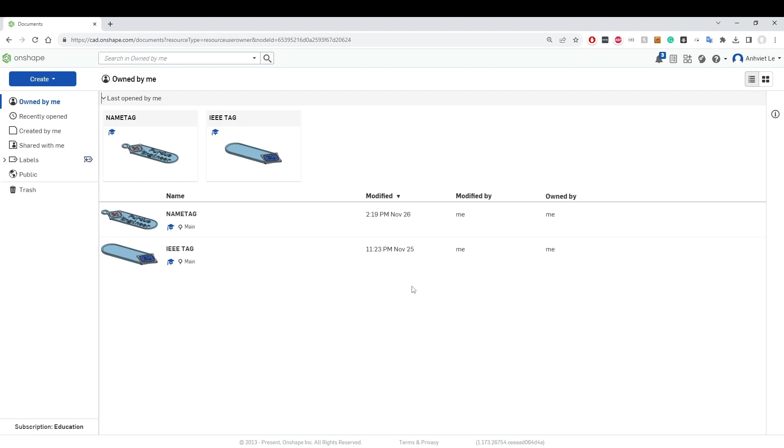Once the item is created, click on the top right where the name is, click Account, then Preference. Make sure the default units are on millimeters. Then scroll down and you can change the mouse settings to however you like. There are options for SolidWorks, NX10, Creo, and AutoCAD.

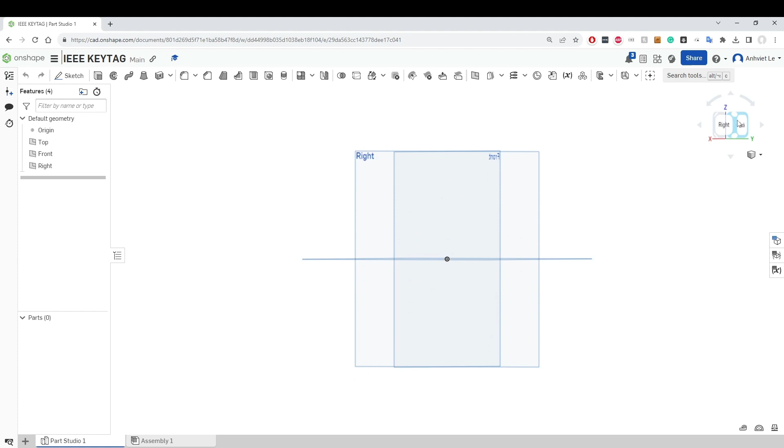If you right click and drag around, you can rotate. If you hold Control and do the same, you can pan around. Click on the corner of the cubes to get different views. You can click on the side of the cube to get an overall view.

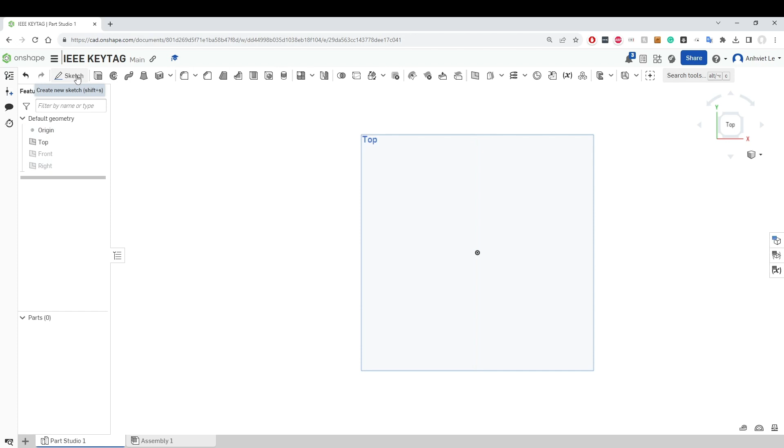Click these two icons to hide the front and right view. We're going to be focusing on the top view from now. Click on the sketch in the top left, then click on the top view. This lets us put a two-dimensional sketch on the top plane. We can rename it. I'm going to call it Import DXF.

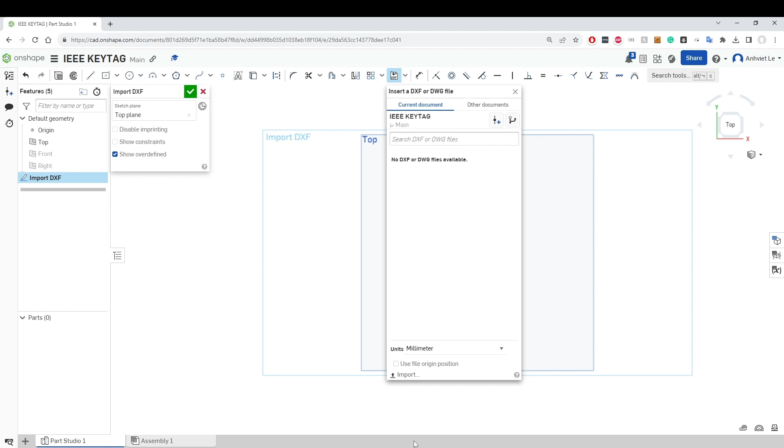Then select the DXF button and click Import DXF. Click Import and choose the file that you downloaded, then click Open. Then select the item, and it should display on the screen.

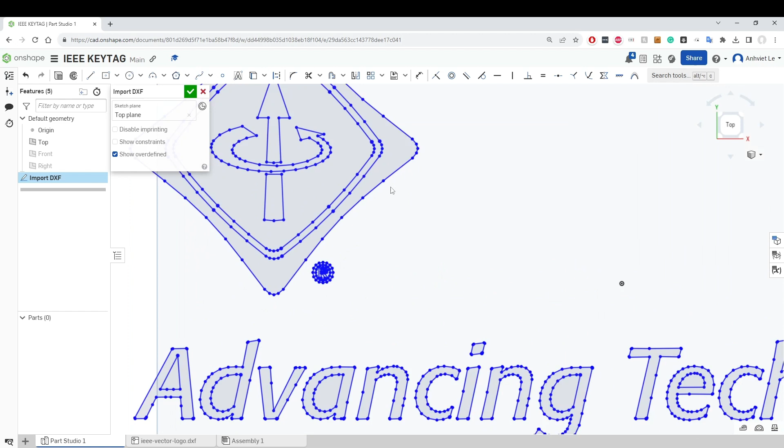Use the mouse wheel to scroll in. We're going to click the inner and outer edges of the logo, and on the top left, click Extrude.

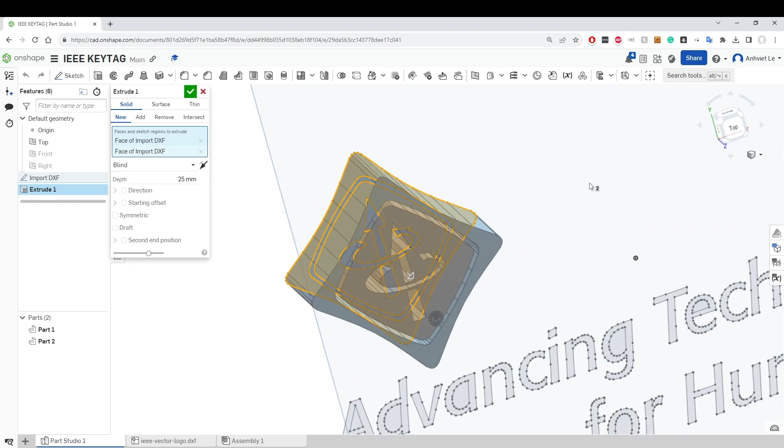If you look at different angles, you can see that normally Onshape extrudes at 25 millimeters. We're going to click the corner of the cube to look at a different perspective, and change this 25 millimeter number to 3 mil. I think this is a good Z height for our key tags. Click Enter.

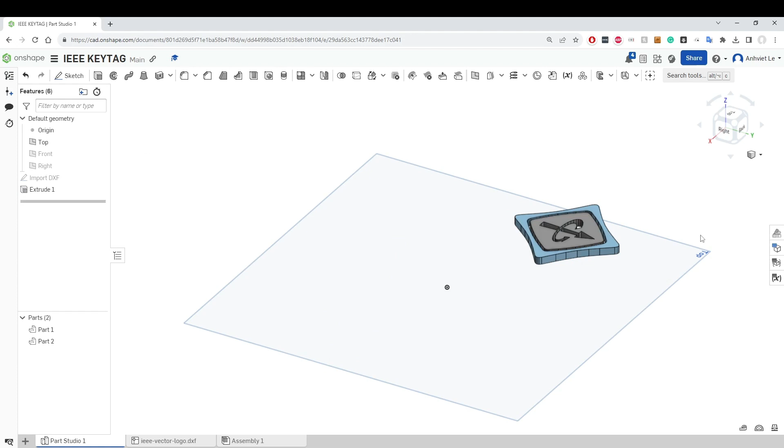If you look at different views, you can see the IEEE logo, but it's missing its back. So let's fix that.

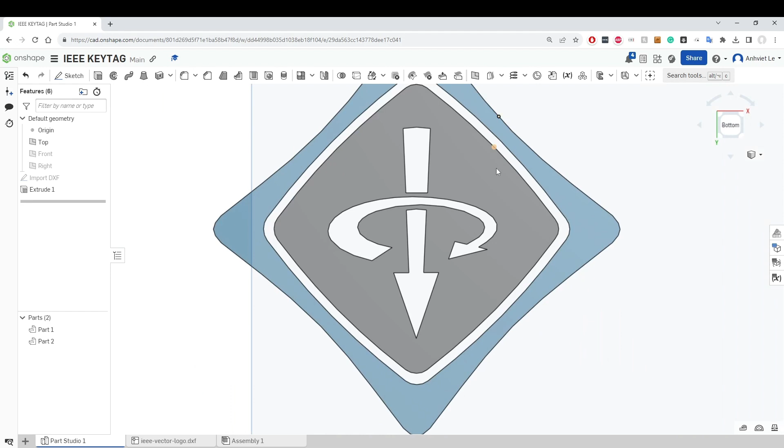Let's click on the bottom view, move around, and create another sketch. Click on the sketch icon and click on the back of the IEEE logo. We're going to create a two-dimensional sketch here. Let's rename it. Let's call it Back Logo Sketch.

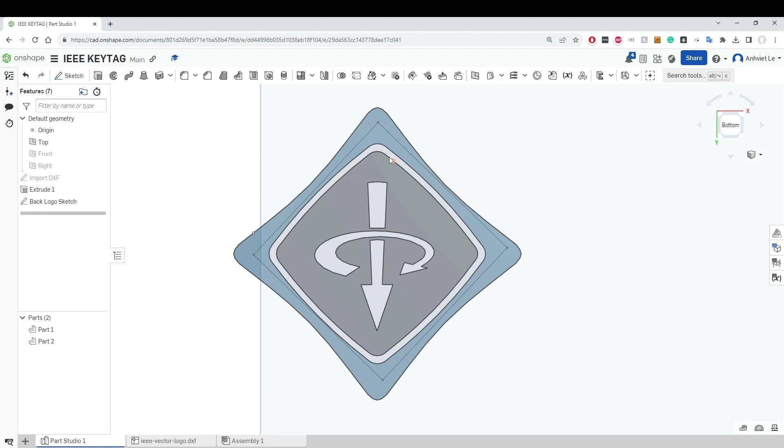Let's do an aligned rectangle from the rectangle box. We're going to try to get the inside, try to cover the inside perimeter of the IEEE logo. So that should do it. Click it, and now you have this aligned rectangle box. We'll click the check mark. We should see that we're able to hover inside and select the inside of the logo.

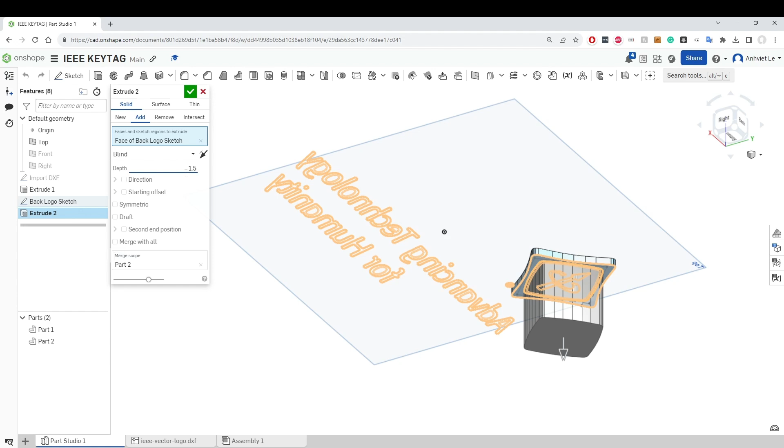We're going to click the extrude button, and if you look at different perspectives, at this corner angle, we can see it's coming out 25 mil. We want about half of 3 mil to give that a backing, but you see it's going the wrong direction. Click on the arrow and it'll go towards the other direction.

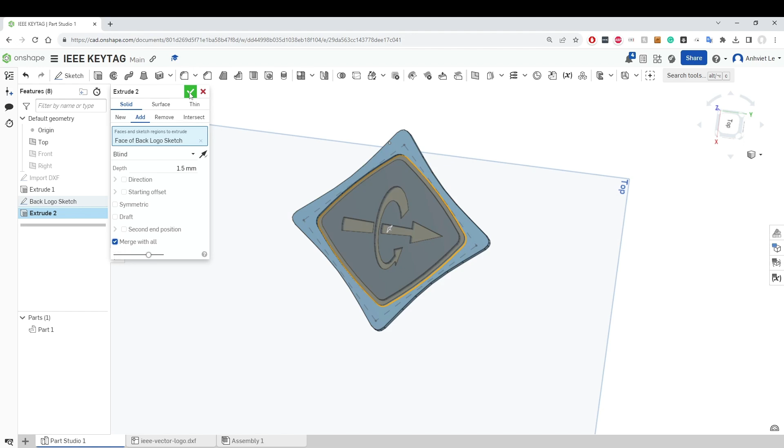All you have to do is click merge with all, and now we combine the parts together. Click OK. We have one object, the IEEE logo, as one item with a solid backing.

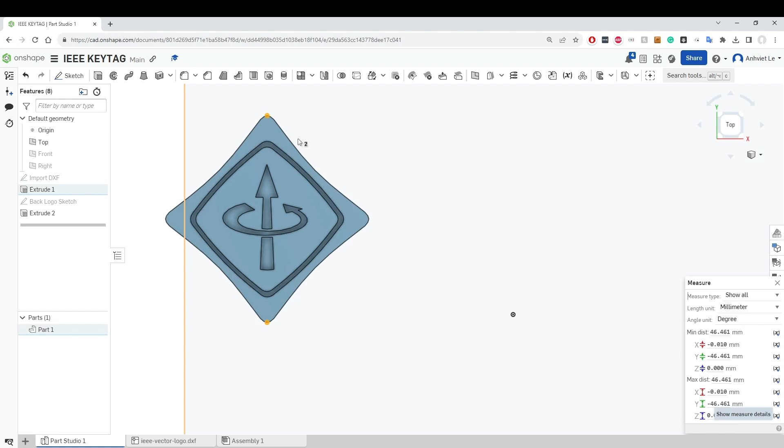Now let's measure this logo. Click the top view, zoom in, and on the bottom right, click this measuring icon. I'm going to click two points, on the bottom and on top of the logo. And we get roughly 46 millimeters distance.

So we're trying to get that down to 30. Let's do 30 divided by 46, which is 0.64. So we try and shrink this about 0.64, or 64%.

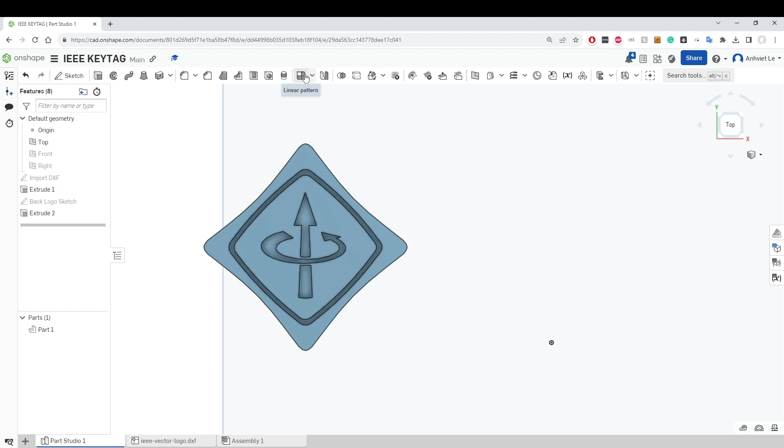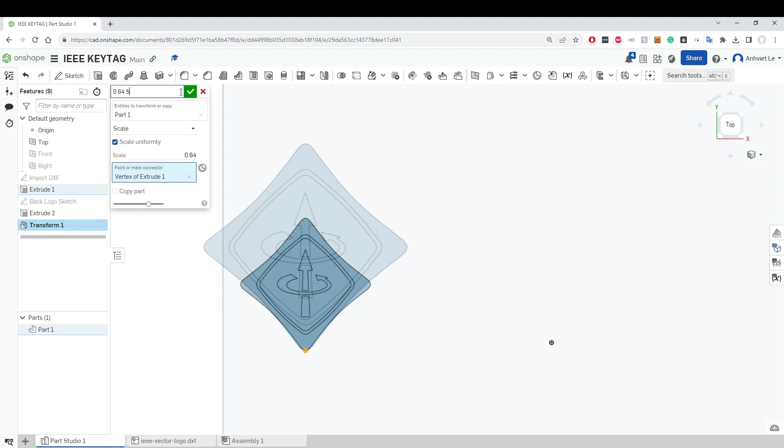Click on the part, click transform, we can click scale, and then type this value, 0.64. And we're going to shrink it, click rename it, call it 0.64 scale, click OK.

And now if you measure it again, we're roughly under 30 millimeters, 29.7. Okay, now let's start building out the rest of our key tag.

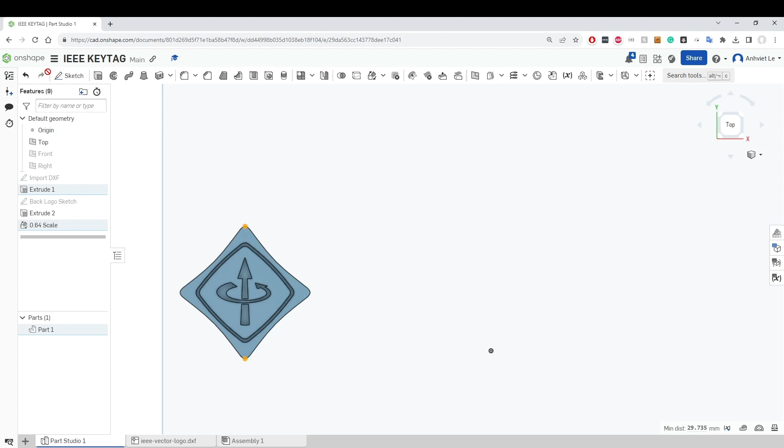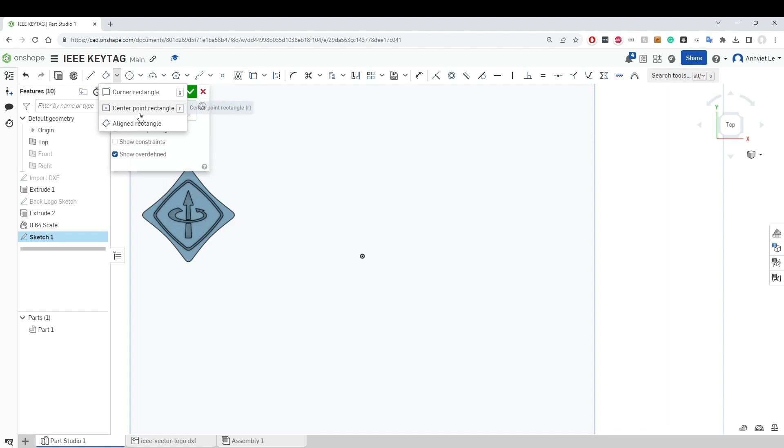So let's build the rest of this key tag out. Click on sketch, and click on the top plane, and let's do a center point rectangle at the origin, and drag it out. Doesn't really matter.

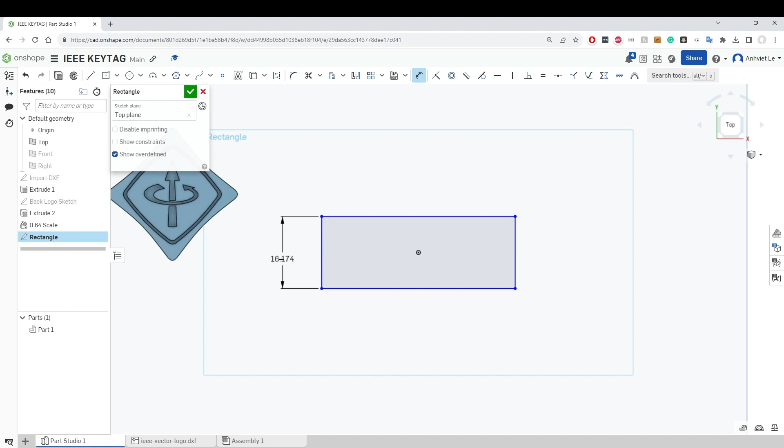I'm going to click on the dimension icon in the top bar. I'm going to click on the left of the rectangle, drag it out, and 30 millimeters should be good enough height. And then I'm going to do the same on the bottom, and 60 millimeters.

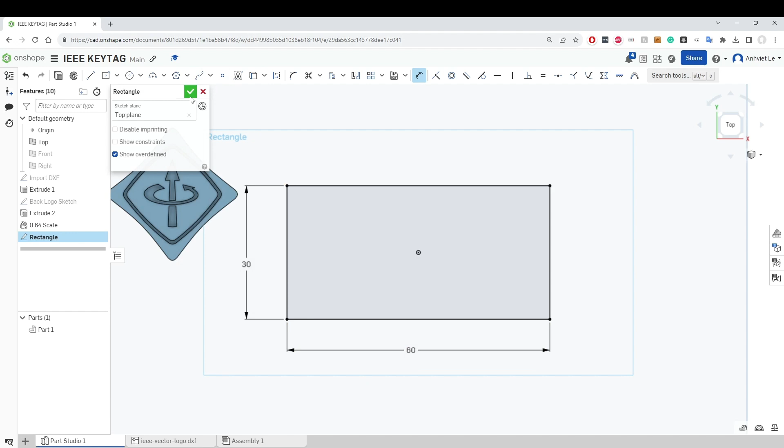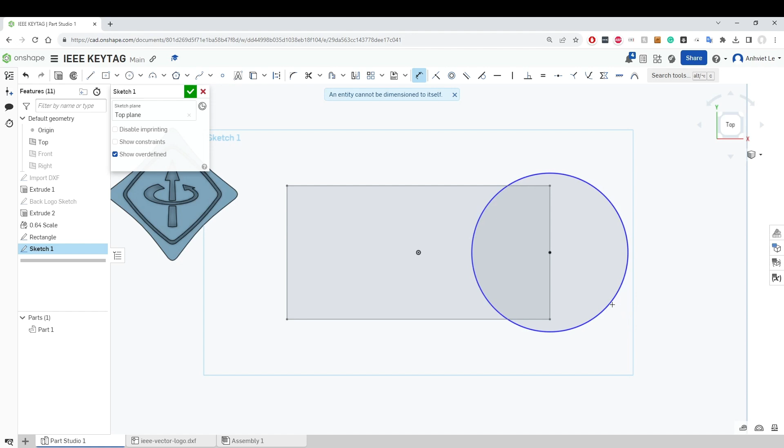Go and create another sketch. Let's do it on the top plane. Let's do center point circle, kind of line it up here. Doesn't matter the measurement now. We're going to click on the distance tool, click inside the circle, and click again. Let's do 30 millimeters.

Let's name the sketch. So I'm gonna call it circle.

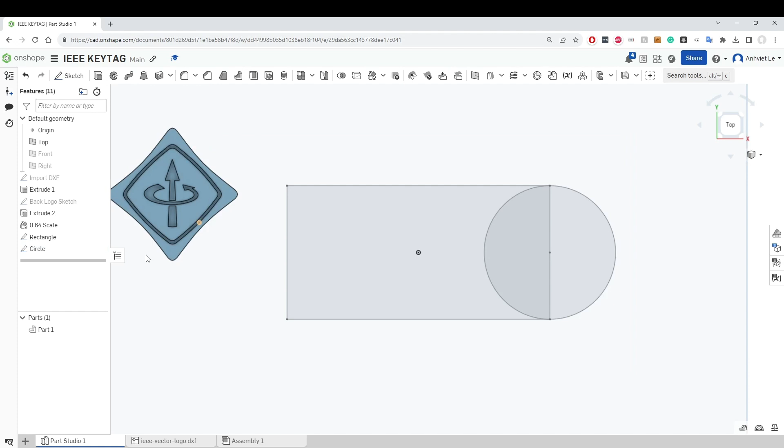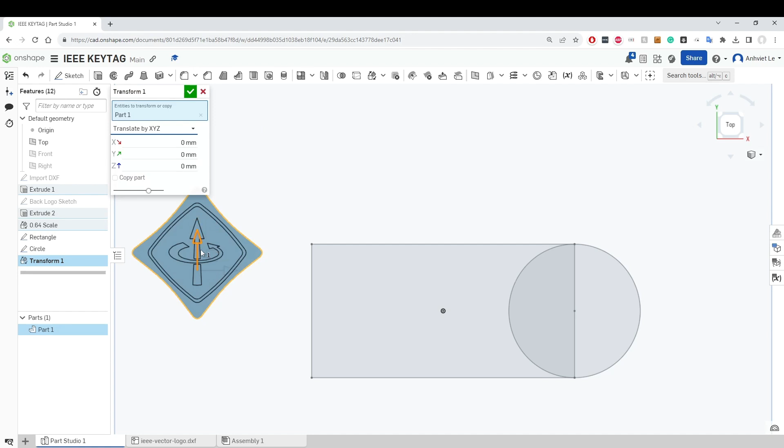Let's move this logo, the IEEE logo. So we're gonna click on parts on the bottom left, click on transform, and then we're gonna click on translate by XYZ, the third one down. Let's move it around and bring it closer towards the rectangle. It's the right arrow to move to the right, and up arrow to move up.

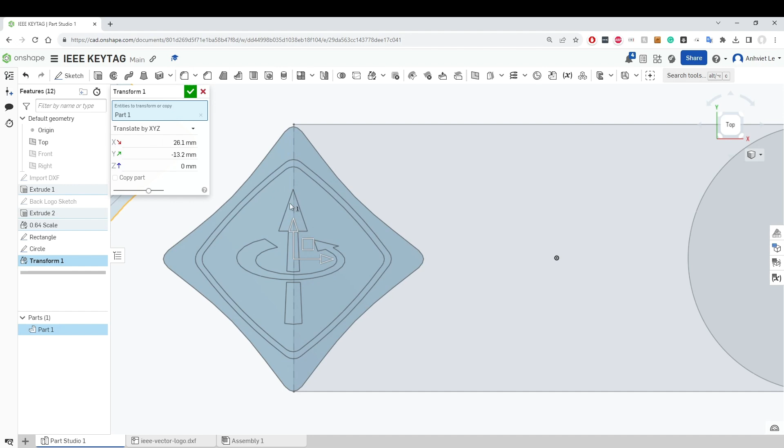Let's create another sketch. Click on the top plane, and let's click on the line icon on the top left. Click on the bottom of the IEEE icon, drag it over to somewhere around in the middle right here, and to the top of the IEEE icon, and then to the right of the rectangle, bottom right of the rectangle, and connect it all the way back to the bottom of the IEEE icon.

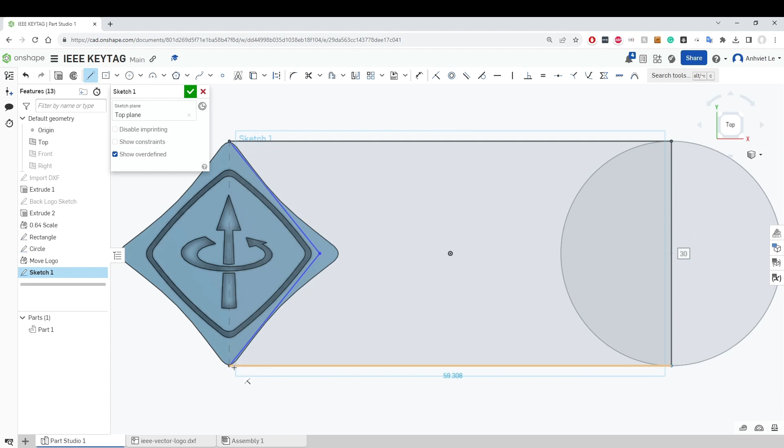So click the inside of the rectangle, the outer side of the circle. Click extrude. Just click on merge with all. And if you look, 25 mil is too big.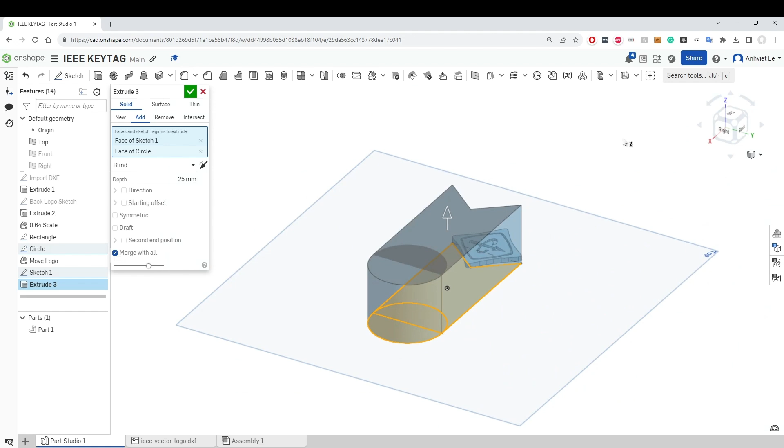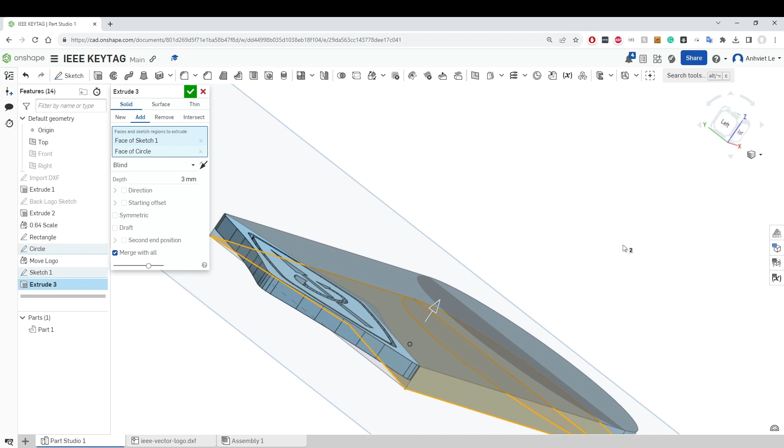Let's do 3 millimeters real quick, just to compare. That's the height we want. And something doesn't look right. Oh, the IEEE logo, it's smaller. So yes, we made a mistake early on.

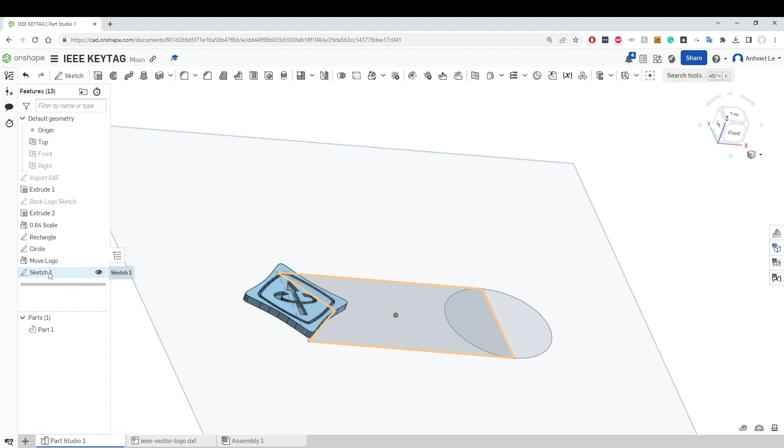The good part about OnShape is that we could go back and fix this. So let's do that. Let's close out that sketch. Let's go up to the scale right there. Let's click on edit, and where it says scale uniform, unclick that. The z-axis we should not scale. The height should remain at 3 millimeters.

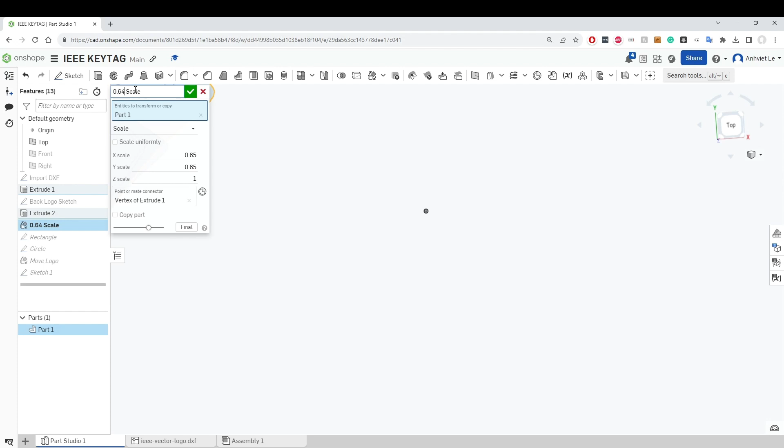Let's put x and y to 0.65. I want to make it a little bit larger. Let's rename it. Okay, click save, check mark. And yep, our logo is a little bit bigger than that 30 millimeters.

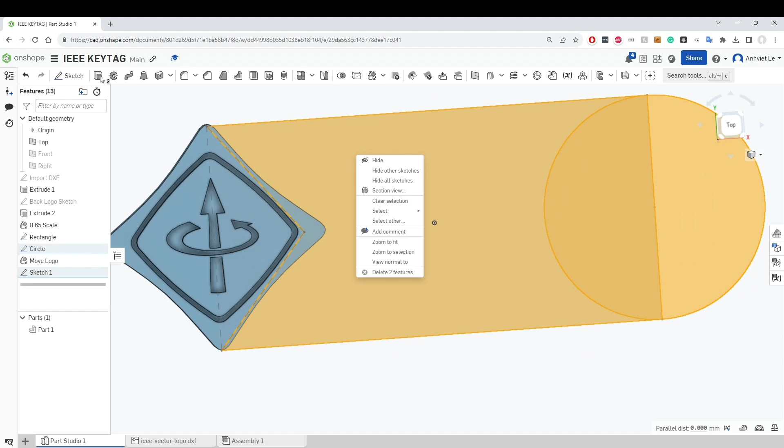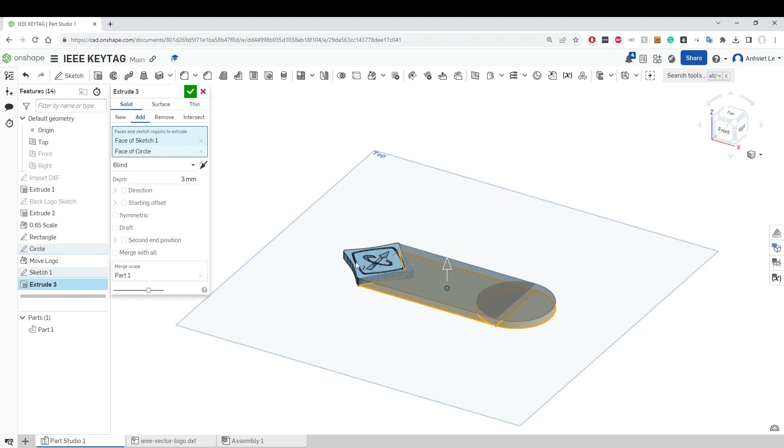I'm gonna click the inside outer edge, and let's extrude it now. Click on the side corner. You'll see it's way too tall. Let's look at it at 3 millimeters. And it looks pretty good. The height of our extrusion looks like it matches the logo.

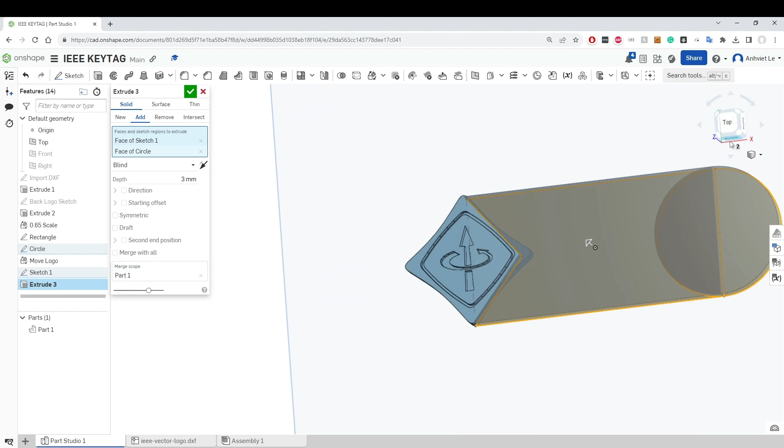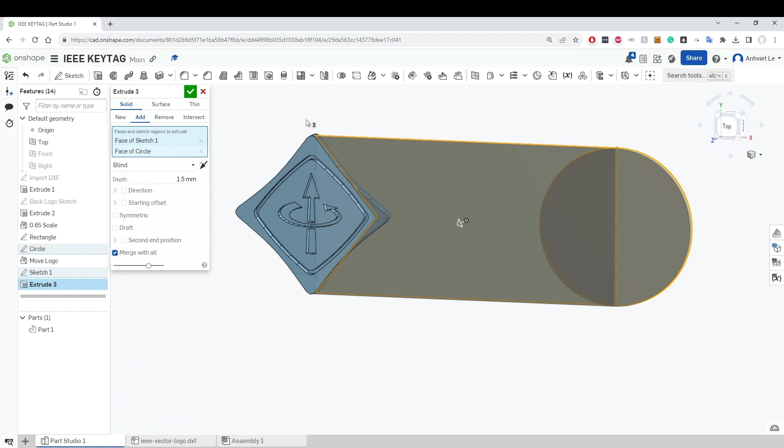We could test that by clicking on the left side view, and yep, it's flat. Perfect. Let's set the 3 mils to 1.5. Merge with all and confirm the change. Perfect.

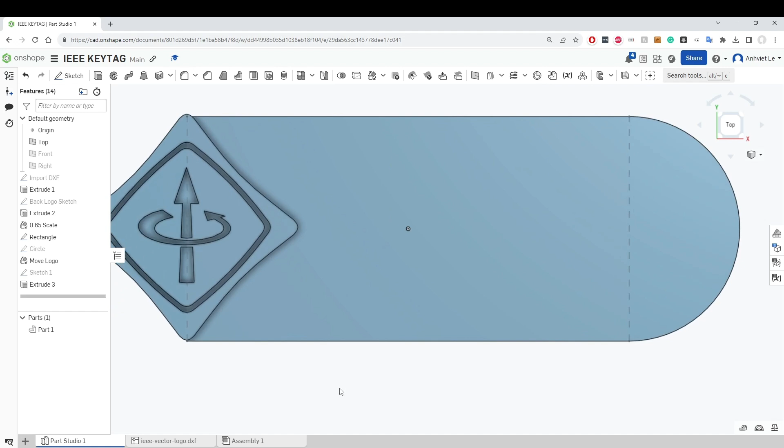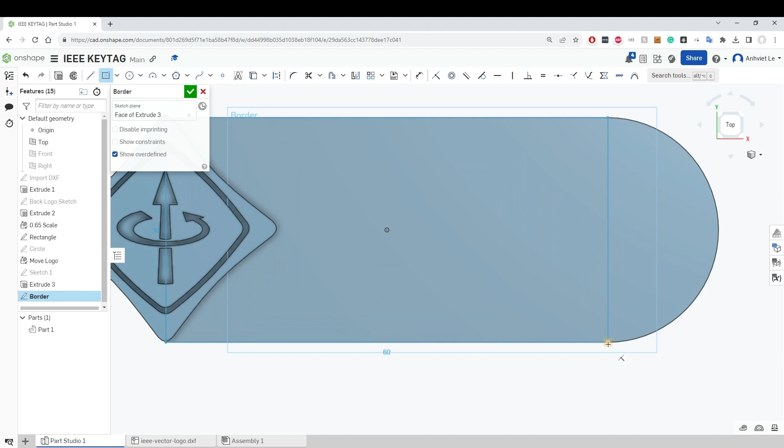So time to build out the border of all edges. I'm gonna zoom in a little bit. I'm gonna create another sketch. I'm gonna click on the inside the Keytag plane. I'm gonna call it border. I'm gonna make a center point rectangle. Sketch. Drag it across. 60 wide.

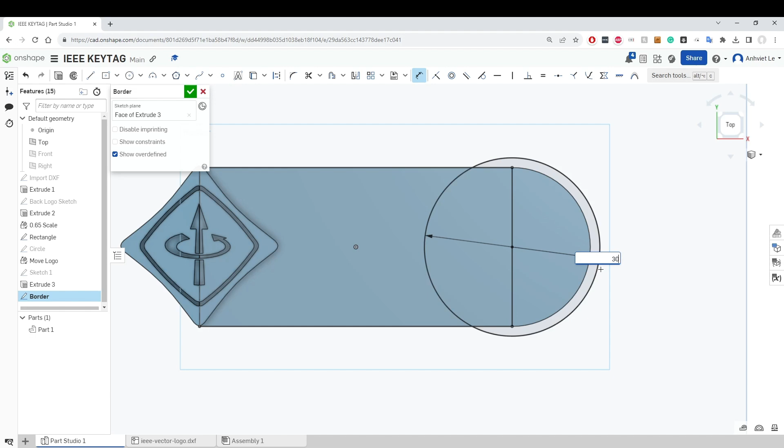Perfect, awesome. Let's do the same thing with a center point circle. So click it. Can't get it to that 30 mark, so I'm gonna use the dimension tool. Click on the circle. Type in 30. Boom, got my circle sketch. So we have the outer perimeter.

Let's do the inner perimeter. So same thing, center point rectangle. Try to get to 60 wide. Good. But now I gotta adjust the height for the inner rectangle. So find it. Okay, found it.

And then I'm gonna do 28. No, I think it's too thick of an outside border. Let's do 29. Too small. Let's do 28.5. Yep, I like it.

Let's do the same thing for the center point. Oops, wrong one. Center point circle, and let's do the dimension, and let's type in 28.5.

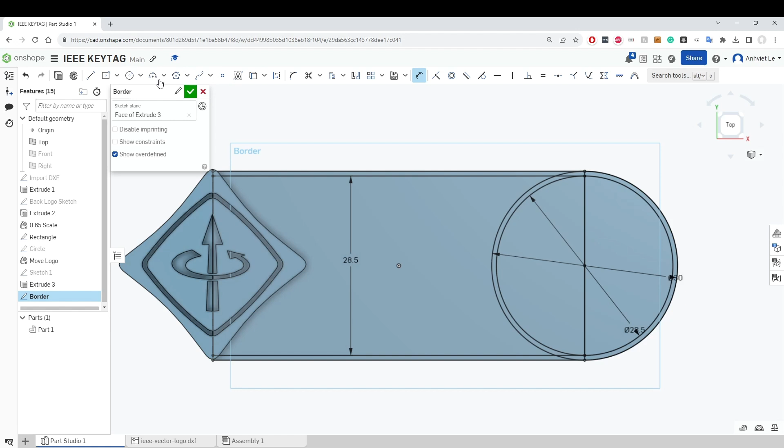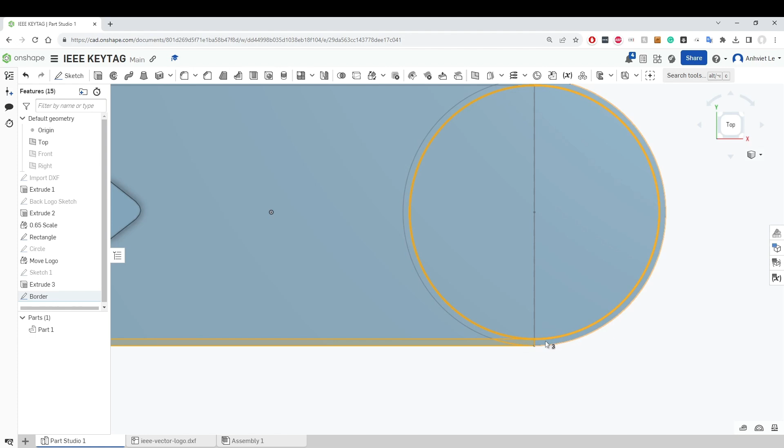Okay, I'm gonna click OK. I'm gonna zoom in and try to select the outer bounds of these circles. It's a little difficult. Select all of them, let's go up at the top and get to the last part. Come on.

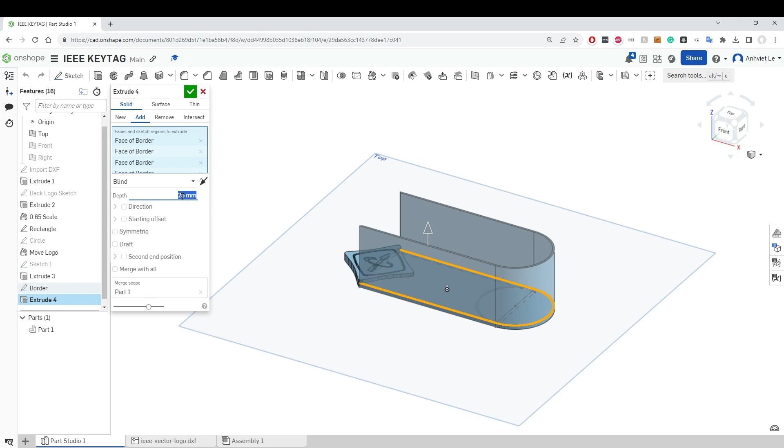Got it, okay. Now we're gonna extrude. Click the extrude button, and we already know we're 1.5 millimeters high, so 25 is too much. We're gonna add another 1.5 to get to that 3 millimeter mark.

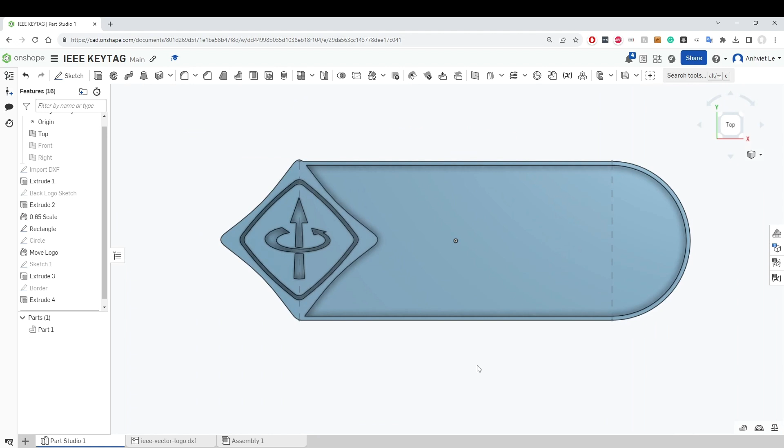Okay, great, looks good. Now it's time to create the ring, the key ring portion where the ring hooks onto. I'm gonna move around, see what's the best way to do this. Just bring it to the back and create a sketch. Click on the back of the key tag.

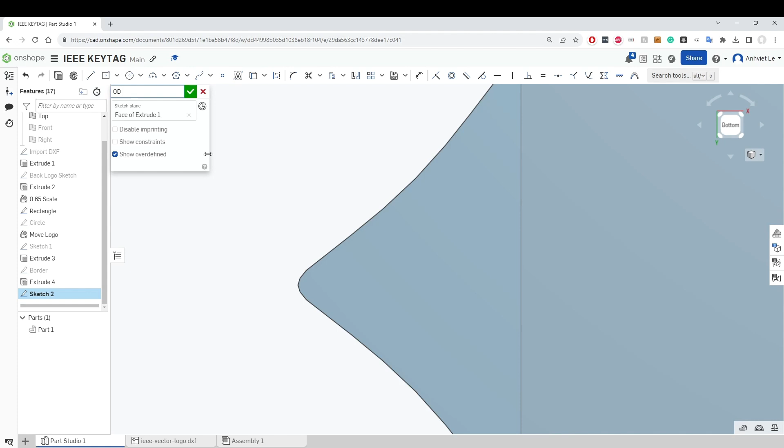Zoom in. Center point circle, and around right here, drag it out, and just call it 12 millimeters. Let's do another center point circle. Let's do this one for 8 mils.

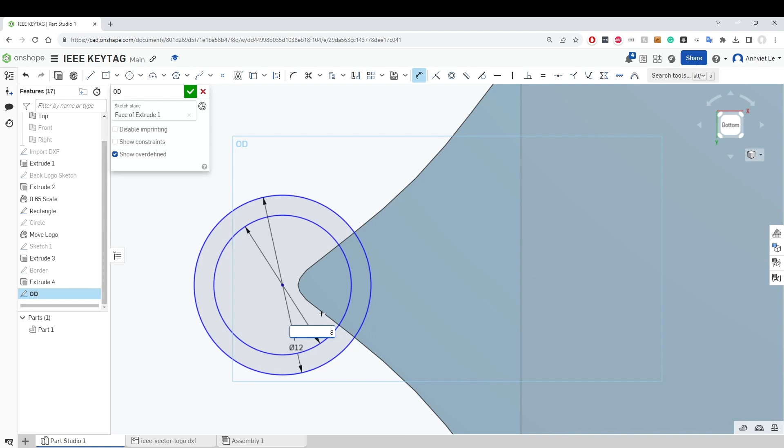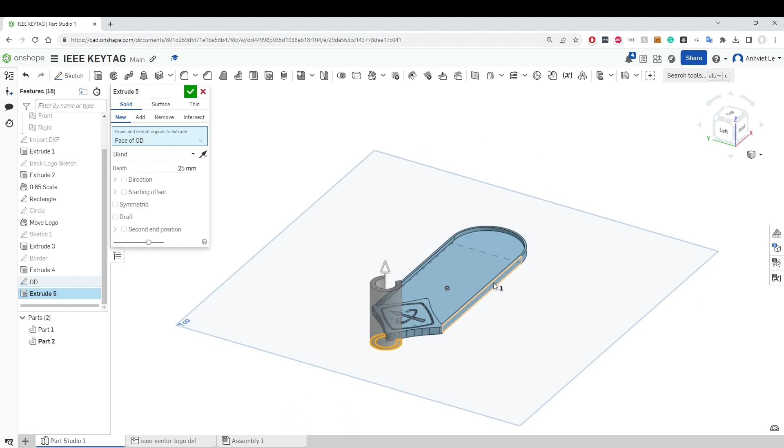Click OK. Click on the outer circle, and let's click extrude. It's the wrong direction, let's flip the direction. Three millimeters, now this should match. I'll confirm the changes. Once I click merge, it was done. Now we can start adding some text.

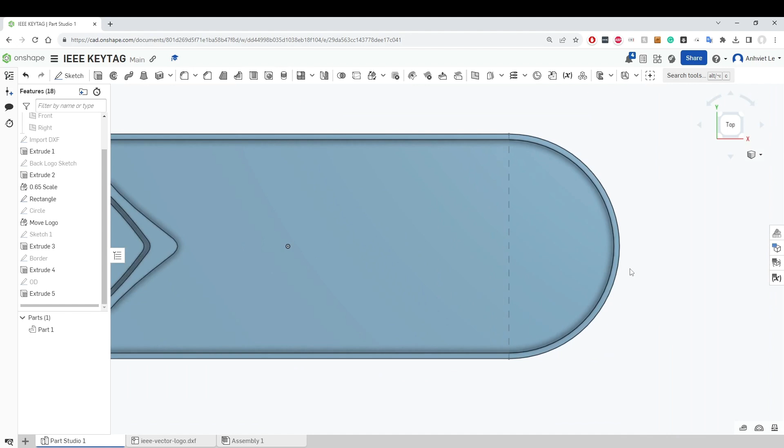To add text, I'm gonna add a sketch. Click inside the key tag. I'm gonna call it the top text. And then I'm gonna click text, drag a box. And then let's think of something. Let's go Purdue. Okay.

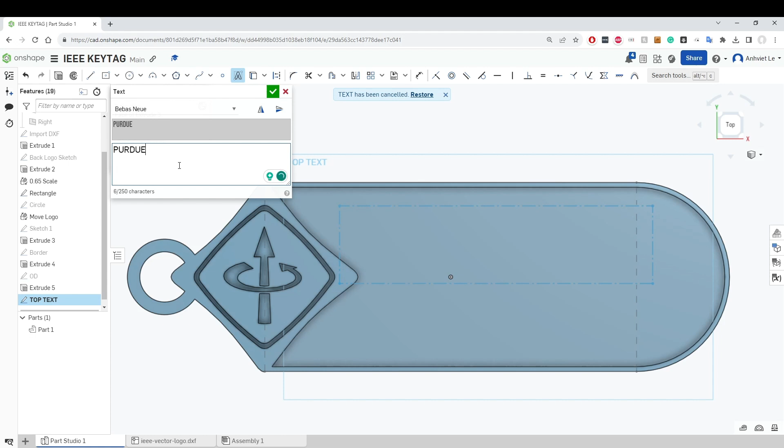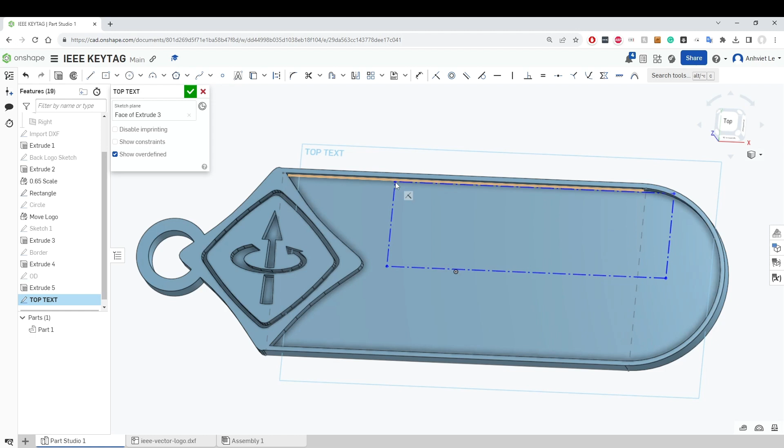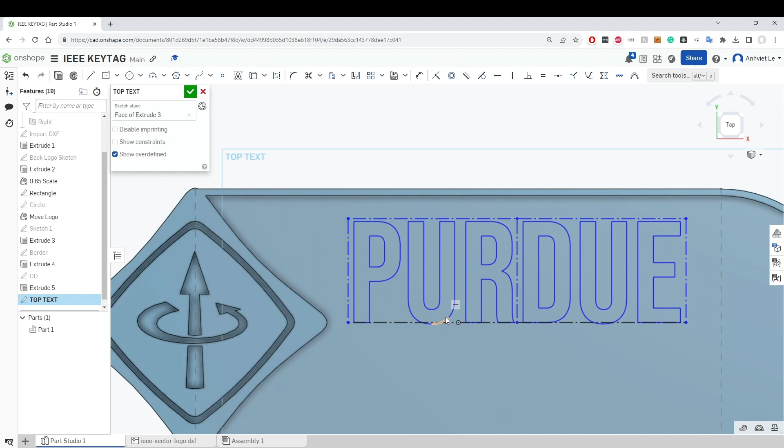And then click on edges and drag it around. Sometimes the edges move around, sometimes it stretches it. I'm still learning it. You also right click and change the dimension. So lining it up to how I like it. You can play around with whatever text you have. You put your first name if you want, last name later.

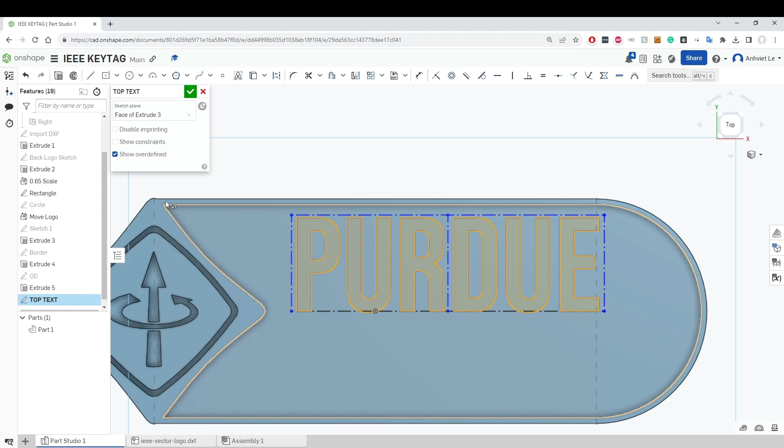Okay, that's a good spot for me. Let's select all the letters inside, and let's click the extrude button, and let's do, 2.5 is too high as we know, 1.5 millimeters. Perfect.

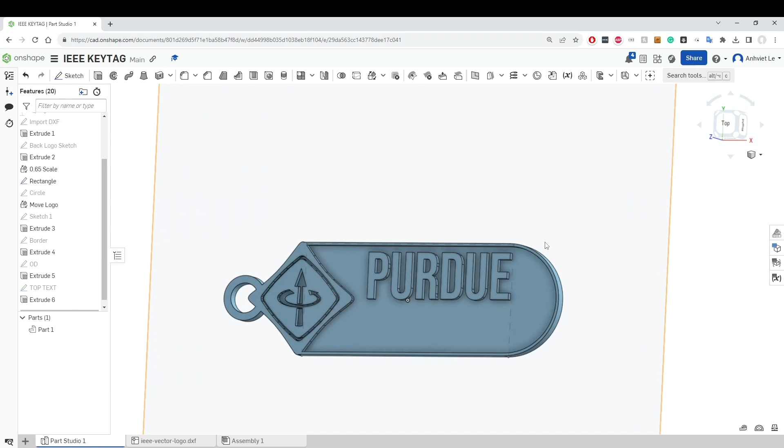Okay, now let's do the bottom text. So save that, click OK, and same procedure. Sketch, click inside the plane of the key tag. Let's call it bottom text.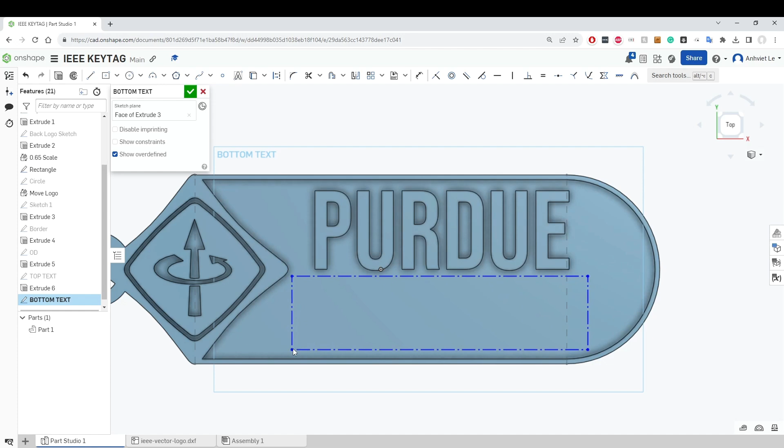And let's call it engineer. We're Purdue engineers. Okay, let's drag this around, try to make it fit in nicely. Looks good. Just select all the letters inside. And same procedure.

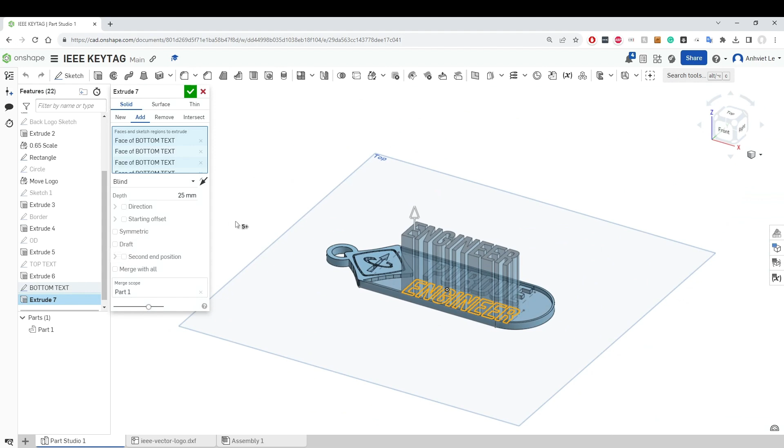We're gonna extrude, and let's do traditional 2.5. Merge it all. Okay, that, and we're good. Keytag's looking nice, just checking if it's flat on the plane. Yep, looks good.

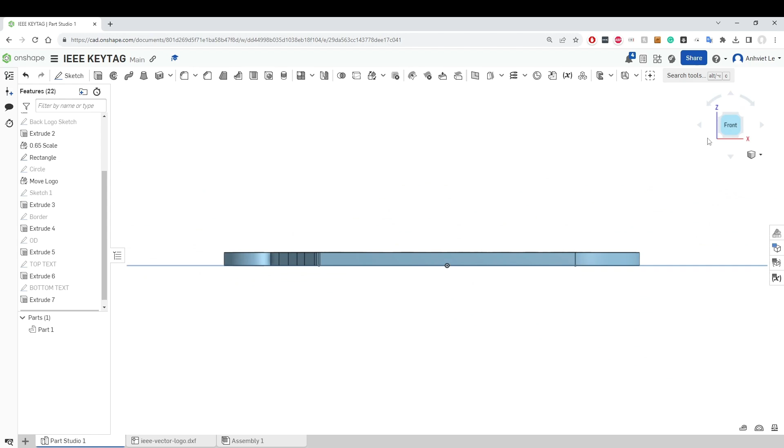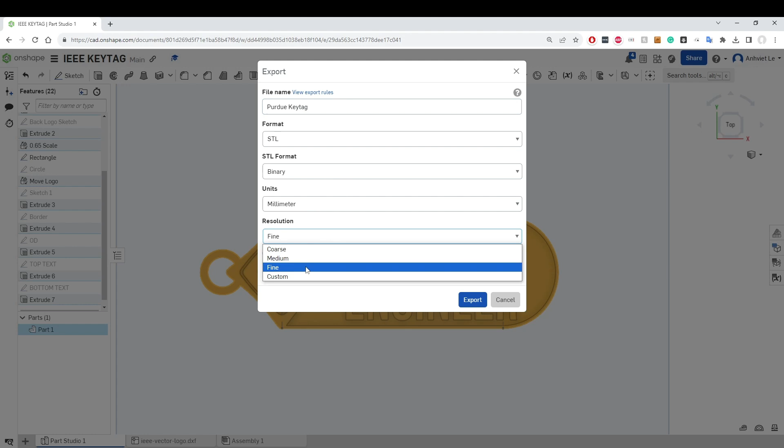Awesome, so that's right click on the part, click export, and we're going to export this as an STL file. This is great for using in slicing software. Let's name it, we'll call it the Purdue Keytag. Keep it at the fine resolution.

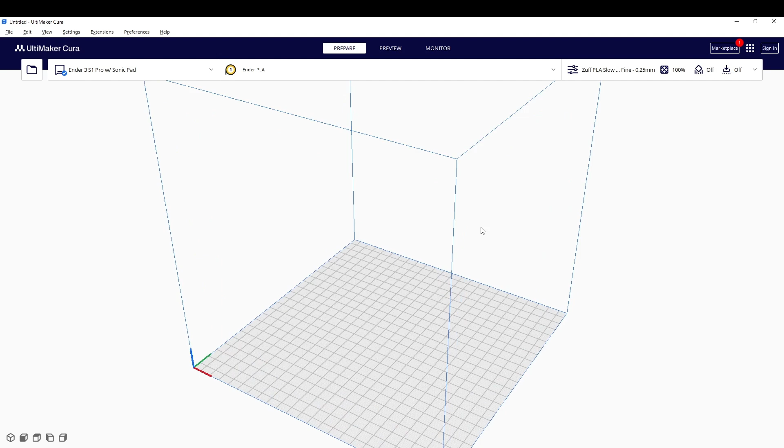You don't need to change any of the settings. Once you export it and saved it, go to the slicing software. I'm using Ultimaker Cura. I'm gonna put in PLA, and I will have some preset defaults. We can go into that a little bit later, but once you have a printer, there's a slicing software you could pair with it. You could go with third-party slicing software.

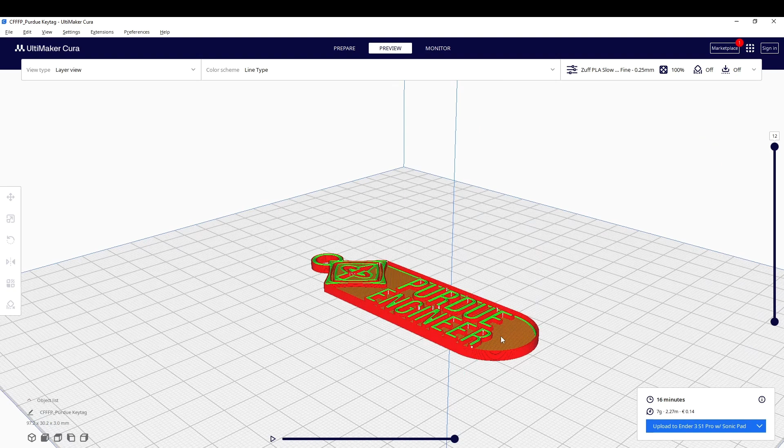I'm dragging the Keytag in now from that file we just downloaded. So this is the STL file that Ultimaker Cura takes. I'm gonna click render, and now it is processed and sliced into G-code. Yeah, we're gonna use this G-code and bring it into the printer. And it's estimating about a 16-minute print for this Keytag.

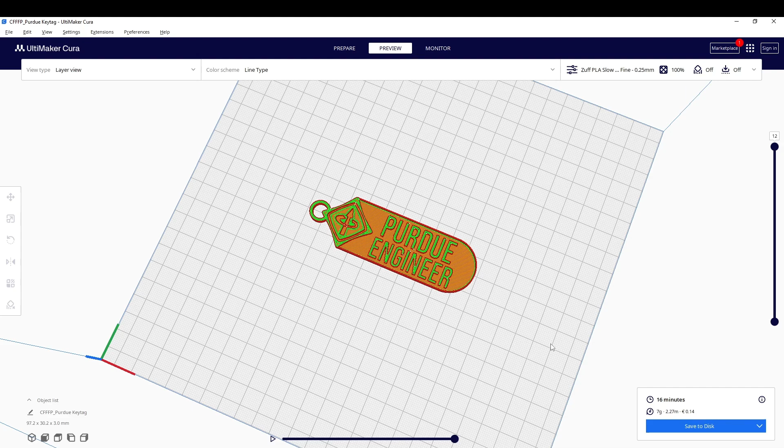The slicer software produced the G-code, and now we could put this on the printer and click print and wait.